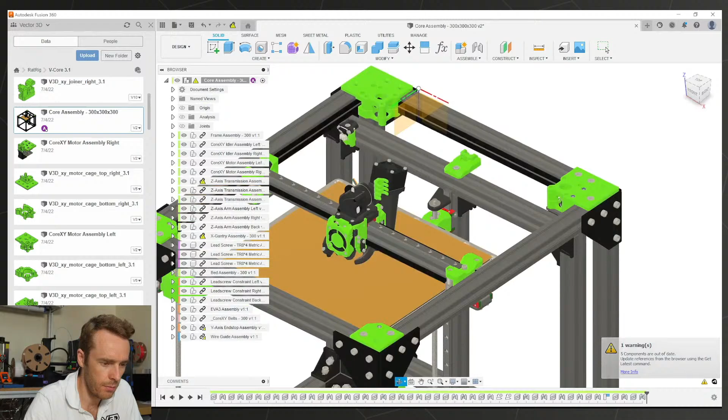Hopefully I can handle this fine. Yeah, it seems reasonable. Oh, it's a bit laggy. I think I've left an origin on one of the parts, but that's okay. It is still laggy. Maybe there's something in here that's particularly difficult for it to draw. Which parts are we up to? Did we finish XY joiners? Guide assembly. I think we can do these front idler assemblies. This would be a good one to do.

Oh, cool. Am I audible enough? All right as well.

Right, this looks good. So, going to use mostly the same techniques as we did in the last stream. Expanding holes, so we expand them by, oh, hang on, no. Sometimes this is weird. I don't know when it chooses to do one or the other. Oh, let's copy the bodies. Forgot to do that. There we go. Sometimes it sets that dimension here, whereas other times it will do it properly and it will be an offset based on the current dimension. Ah, there we go. It just needs to be that. Cool.

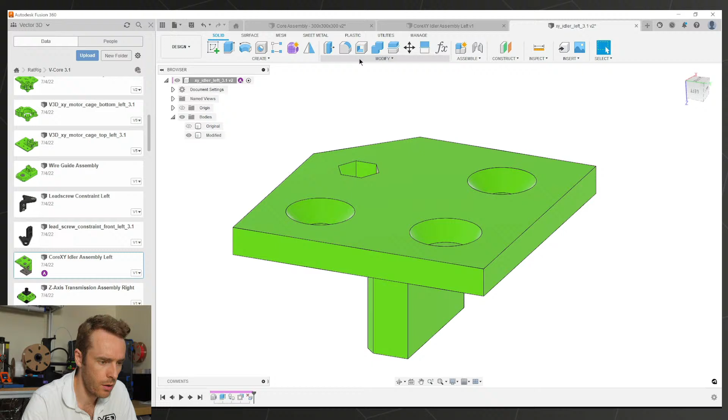So that just makes the holes a little bit bigger. Oh, I forgot to turn off the original body and then do it again. Minus 0.1. That enlarges those holes a little bit. Then we need to take off this chamfer. Edit this feature. Okay. Then we put on a new chamfer. Change it to 2 distance, 1 and then 0.5.

And then we've got some extra chamfers around here. I think I put these as 2 before. I think this needs to be different. I think we had 1.5. I'm going to go check the other part that I've done and we'll make it the same. I think that would make sense.

Skyping in the print room watching this. Oh dear.

So 2 down, 1 in. Okay. One in, 2 down. And then we make this one 2. Hopefully that'll be a bit nicer. Going to put a small fillet on this corner because that's right in the edge of where it's going to assemble, so that pushes right into the corner of the metal parts. So we put a little fillet there to make sure it doesn't collide with anything. If you have really well-tuned pressure advance, then it would be fine anyway, but then we've got this little monster to deal with.

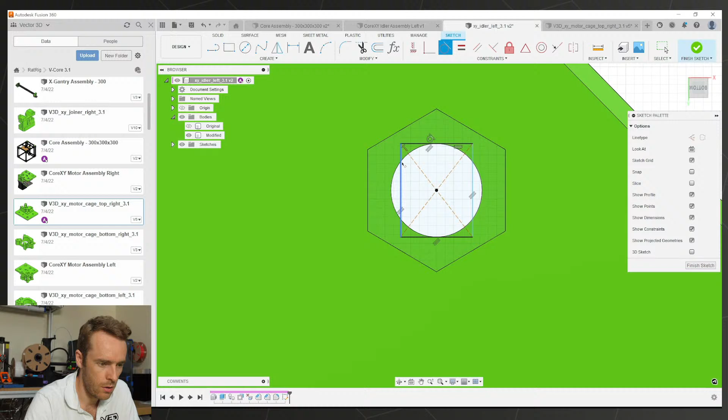Just noticed, because the screen on this laptop is 4K, everything's scaled to make it normal size so you can actually see things. But there are some things that are based on the resolution of the screen. So you can see the mouse now is really, really tiny. And the little symbol to show tangency is also tiny. But as soon as I leave that tool, it goes back to normal size.

Abracabra in Printables. Ooh. Those look quite nice.

I should be able to share this. So these are some alternative XY parts. Yeah, you can see the aesthetic change. They do look quite nice. That little black with green face accent just looks kind of tidy as well.

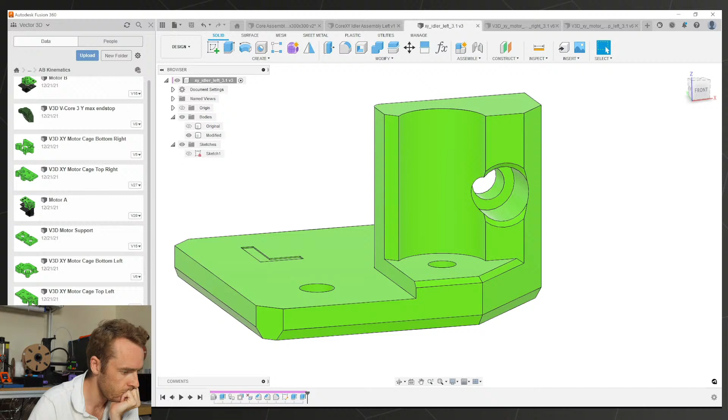This is my old VCore 3 idlers. I probably didn't change them. Oh no, I completely changed. Oh yeah, because mine was a slightly different thing, so totally different design. Okay, let's not worry about that then. Oh, where's it gone?

I might change the design to have a flat top. That might be nice. Let's just do it from here, that'll be fine. Oh, what? That divided by 2. Oh, get rid of that. No, it's upside down, other way up. Twit. Let's just start again.

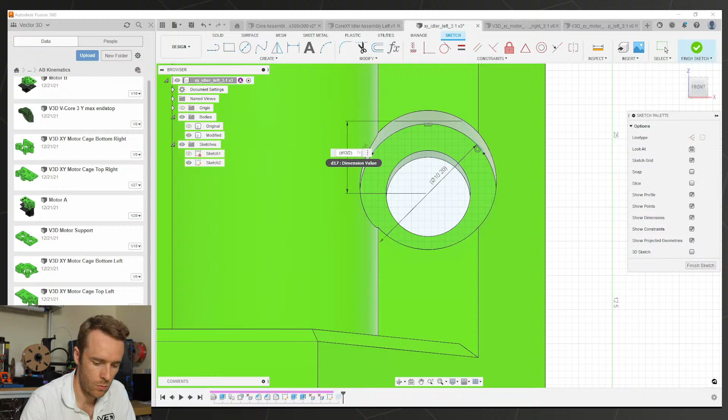Did you have to do any frame adjustments when you were done with building your VCore 3? I didn't adjust the frame on my VCore 3, no. How's your experience with scaling the parts for ABS? I've read somewhere you need to scale them to 100.5% to make them fit. Oh man. Where has this information come from? Everyone wants to scale their parts by 100.5%.

Kind of like this, maybe a bit better. I'm not sure. I really want to be able to just do this three-way chamfer that Pavel does on these corners, like on this. Here. That feature here is basically a cut, a plane cut through here. I don't know how I would do that.

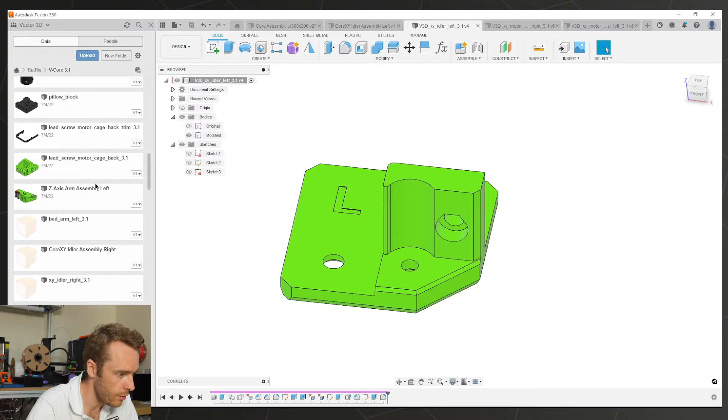Oh, sorry, I just realised I'm on totally the wrong screen. Oops. So we need to find the other one of these. XY idler. So I've got the left one, I'm looking for a right one. Ta-da! Capture design history. Copy the bodies.

I need to go get a fan because it's obscenely warm and I can't work like this. So I'll be back in 2 seconds. We can put some intermission music on.

Right. How many people are watching this? 17. Okie dokie, let's carry on. Oh, is the latency different on this stream? Yeah, it's on normal rather than ultra low. But never mind. It's fine.

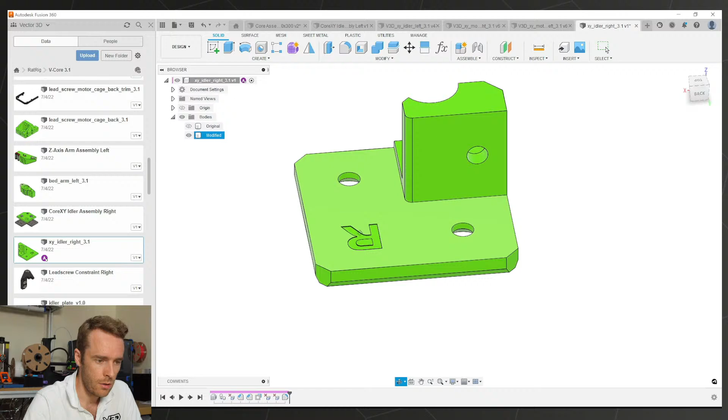Do our offsets for the holes. 1, 2, 3, 4, 5. Look at those, and fillet here. What else was there? This one. We haven't done this. Let's do this before I forget.

That's good. Hey, 247. No, yes, this is with the NDI. It's so much better. Vastly, vastly improved. Nice.

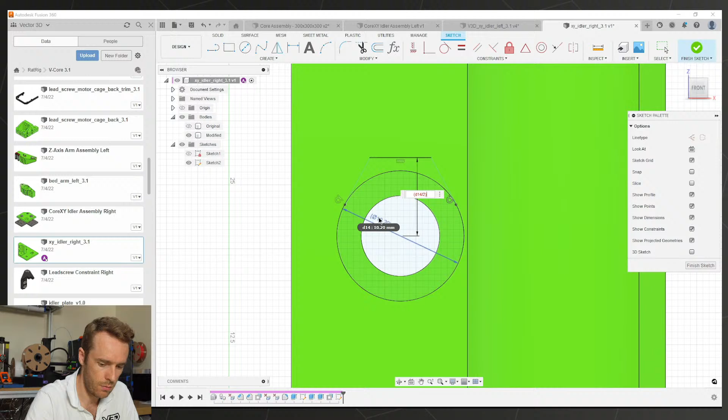We need dimension for this, and then we do this to here, and it's that divided by 2 plus 0.5. And then we're putting, I think it's 2 in it. Chamfer. And then we'll do this bit as well. No, this one was fillet. I think we should put a small fillet here as well. I'm reasonably satisfied with that now.

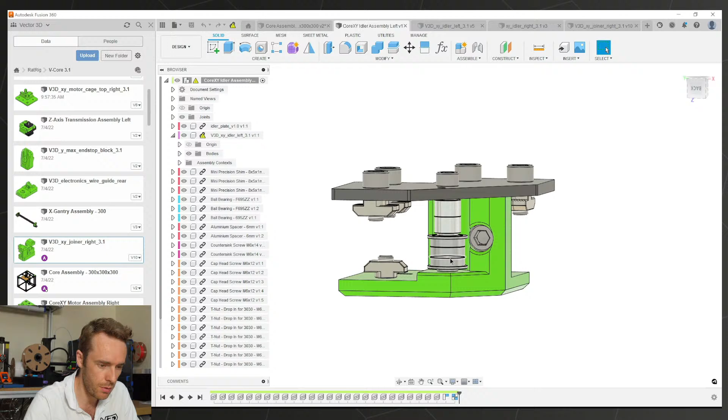On these idlers, where has it gone, that bit that I was just looking at? It would have to be at the bottom here, which means when it's printed this way up, you would end up with a ridiculous support, which is pointless. On the other side, you could do it because these would be at the top and the bearings would be at the bottom. Is there any point? They would look more unsymmetrical. So I don't think there's much to gain, really.

You know what would be really interesting? To have this part without this, just take that whole flange off and just have this tiny little piece that's like this top hat with this through here and maybe a screw that goes into the base of this. That would be interesting.

Why the different heights in the bottom of the nut hole? So in here, this is facing printing this way down. If you try to print a circle, so without that feature, if you try to print this way up, this whole area will have nothing supporting it. So there are a couple of ways you can do it. One of them is the sacrificial layer, which is what Rat Rig quite often do, and it just means you have to take out that layer after you printed it.

I'm not particularly a fan of that because then you get bits of plastic all over the place, maybe stuck in the nuts, and it kind of jams things. It's not a major problem. If you're careful, you just clean it out. It's fine. But if you tried to print it just as it is, it would kind of droop into the hole and just not work very well.

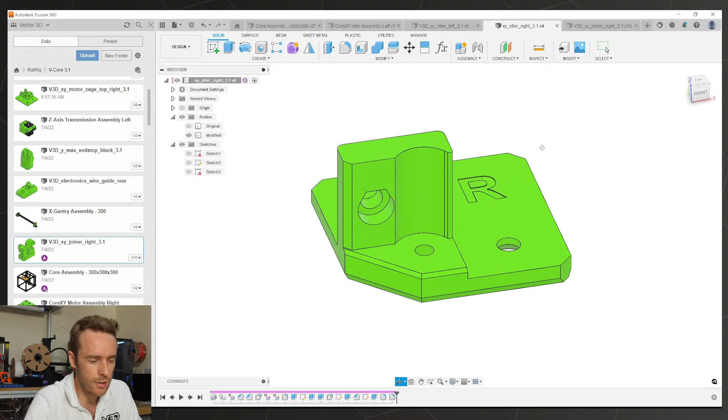I prefer it. The thing for me is, why would you not do it? There's time, and if you have to change your part and then move the feature around, maybe that's a pain. Other than that, I can't see any big reasons not to do it.

One thing I've just considered is that the head of this screw might protrude quite a bit. I think from here we should be able to check that, so let's whack that on there. It does. I'd quite like it not to protrude, so let's work out how much it's protruding by. Basically 1 millimeter. So if we make this -4 instead. Hey, yeah, that's not great.

How do I want to deal with this? Just do this. No, because of this interference here. Oh, there's no reason why we can't just move the hole over a bit. It's not locating into anything, so we'll just move it. I love doing this. Not moving holes unnecessarily, but being able to move a feature within something else is insane. You ready for this? Blub, blub, blub. Done. Move it 1 millimeter across, and then we can hopefully do this 1 millimeter out.

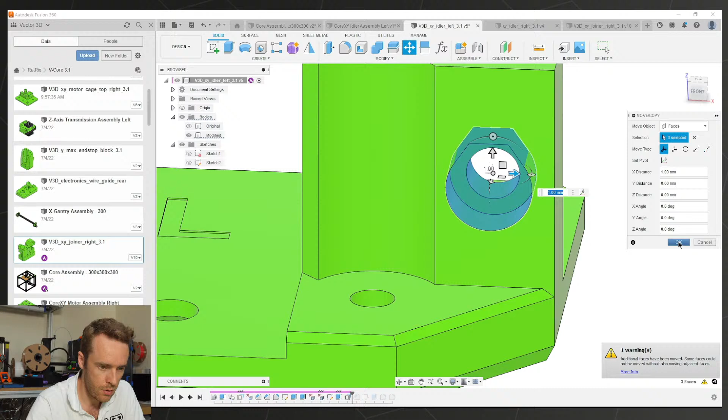What about here? Is that acceptable? Yeah. We don't want that to be weird. We'll just maybe have to redo that. That's fine.

Well, I suppose that's not quite part of this face, so it's going to put that in anyway. Well, that's fine. Whatever. And then we're going to chamfer this. I think that's this anyway. Yep. And then put the chamfer back on here.

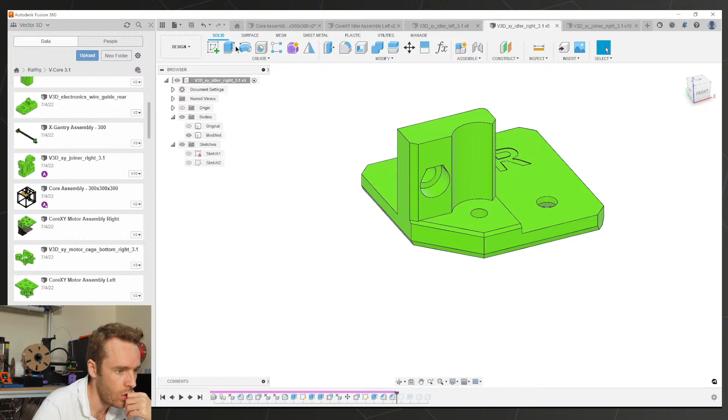We can update this, have a look on here. Ooh, nearly. Right. That looks cool. I like it. I like it. Very, very nice. So which part should we do next? That's the question.

I can't change the latency. I don't know why it ended up on normal latency. It's kind of annoying. We can be going nearly 45 minutes already. That time just disappears.

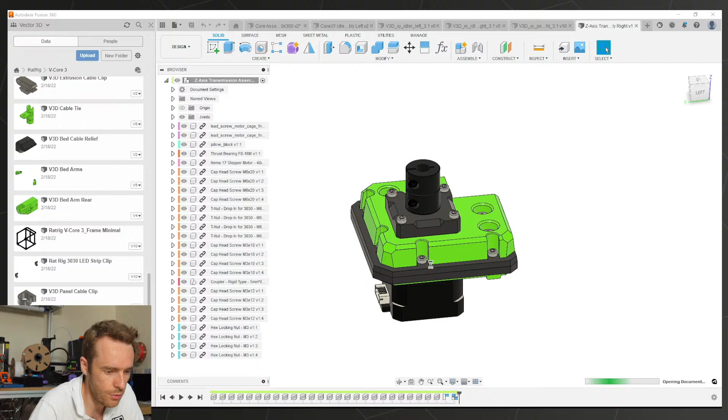Oh, by the way, I hadn't shown this before, but one of my ideas for having stiffer Z mounting was, oh, is it on here? Maybe not. Yeah, this. I think this would be really cool. So because they're obviously using metal plates already, have metal plates at the top of the Z part, and then just plastic as spacers. Make these bolts a bit longer so they stick out the top rather than having to be embedded all the way down here. It should make that really stiff assembly. It's probably alright already, to be honest, but it just seemed like a nice little idea.

So, oh, my doorbell's going. I'll be back in a second. Right.

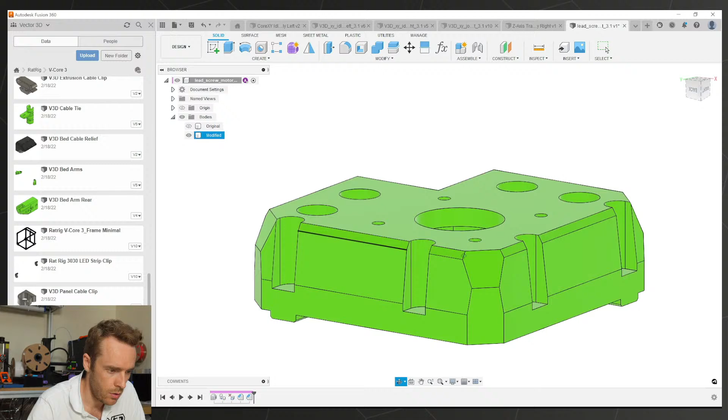And then for the other bits, I'm going to do around here, here, here, here, here, and here. To distance. That's that. This is going to be a little bit not pleasant. Change this to be so, and then we get this on here and here. I think that's a little bit tidier. And then we got the small chamfer for the internal stuff. So

And then we've got to find out what we're going to do on these. These probably don't need anything, to be honest. Oopsie daisy. That looks pretty neat. I like it. So we've got sacrificial layers, we've got plenty of those we can do.

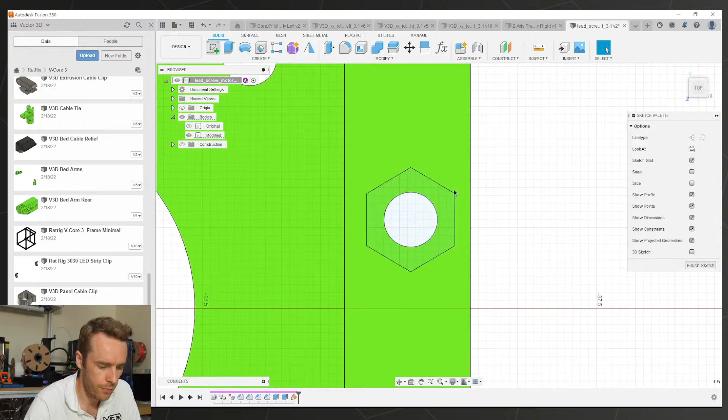Okay, so let's add a plane in. Plane at an angle. That'll do. Down a minute. Oh, I was gonna move this as well, wasn't I? I think this needs to be moved.

The thing I'd be concerned about is this nut falling into the channel. It may not be a massive deal, but let's have a look at the frame. Do we have the whole? Yeah. So here, that nut is right above this. If you put the panel in and then put the screw on the top, as you push the screw in, you could push the nut out the bottom.

I'm wondering if we move it to here, can we still fit the nut in? I mean, it works over here, so it should work here. We can put that in, and then if you press it down, it just depends, I suppose, on the length of the screw. You don't have any extra screw length. I don't know how long those screws are.

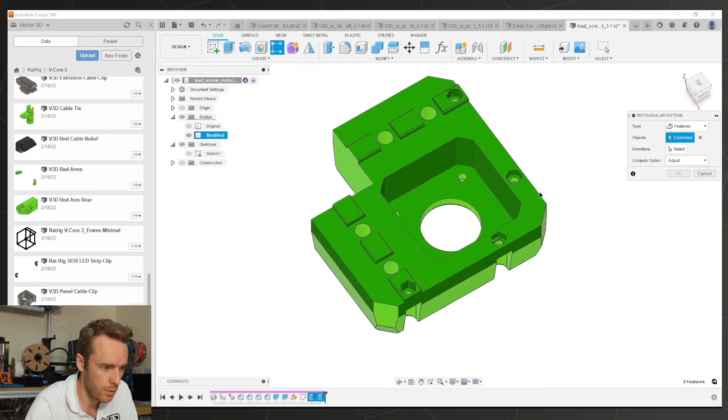That's 42, so we need to then take those two features, pattern them in this direction, 42 millimeters, just two, adjust that, nice, and then take that and that, oh no, that and that, show our construction plane and also mirror the construction plane. Nice.

Apart from I've been an idiot and I've done it on the wrong blooming side, haven't I? What an absolute twit. Oh dear. Delete, delete, delete. Will we need this? Let's still use that. Right, let's try that again.

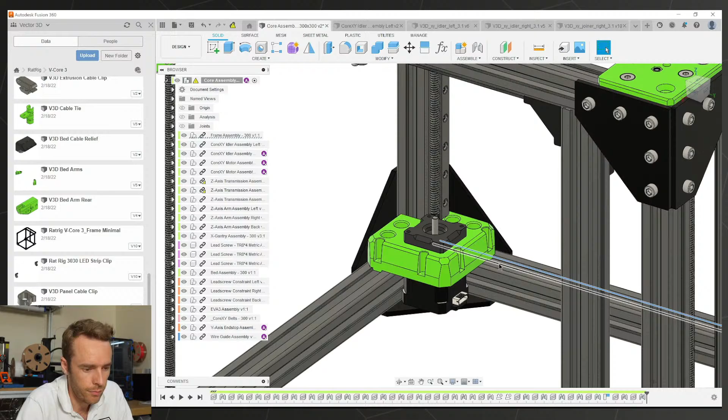Ooh, I've only just noticed that. Is the bed now a new shape? Can someone confirm that the bed has now got that little cutaway? Because that is awesome. Maybe the one other thing that would be nice is some M3 screws or something in the back for alignment. Oh, that's nice. I'm happy. I didn't see that before.

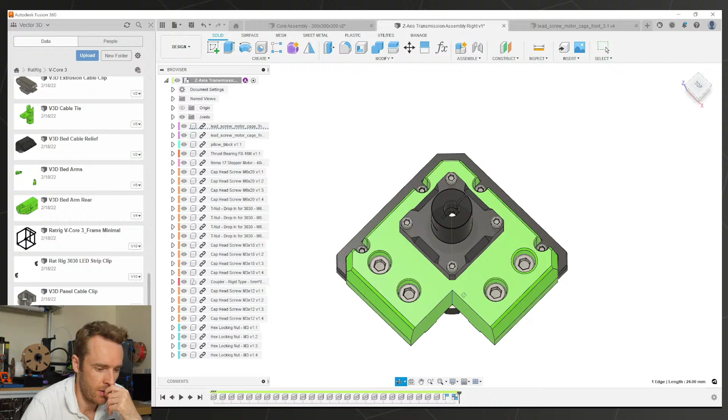Maybe some treatment in this corner, but the extrusion's got a little 2mm fillet on it anyway, so there is a bit of extra material on there that shouldn't be a problem regardless. I'm not sure we need to change this part anymore. Have we done our hole offsets? We've not done any hole offsets. Should have done that at the start.

Jiggy, jiggy, jiggy. Right. Hopefully all this matches back up again. No, it didn't. Great. Fambloobity-tastic. Where's the sketch? See, that's fine. Why is the sketch not? That is not the size of the hole at the time of that sketch.

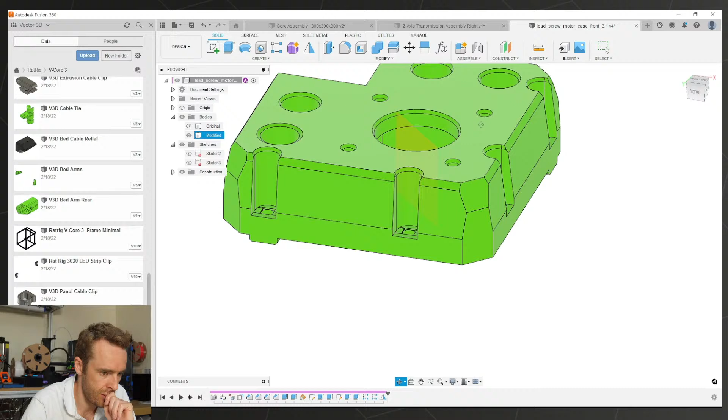What's going on here then? Yeah, those sketch features don't rebuild properly. I think now it's fine. Yeah. I'm half tempted to take these bumps off the bottom, but it might be overkill. What I might do though, because we don't want these to be our critical faces, I think we'll pull these in a bit as well.

It might be wise to put this the other way around. So we're going to have to select here, here, here, here, and here, and set the pivot to be the middle of this circle. There we go. And then, with a bit of luck, we should be able to just rotate it. That'd be nicer. And the same over here. Oops, there it is. I think that'll be a bit tidier.

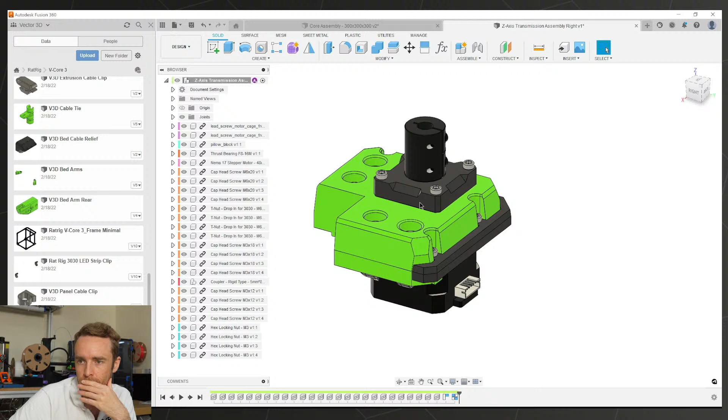Time flies. Hour and what? Hour and 10 minutes. Okay. My neck.

Do we want to make this block a little bit larger? Don't think we need to, doesn't really add much. What about this piece? Does this need anything? Let's just isolate that. Right, let's go and put that way up. There's no way these are going to look sharp. They're going to be a bit wibbly wobbly. What can we do about that?

Let's chamfer. It's only a little feature, but I think it'll help, especially with that little overhang as well. I think as soon as we're here, we'll do this. That should fit pretty good now.

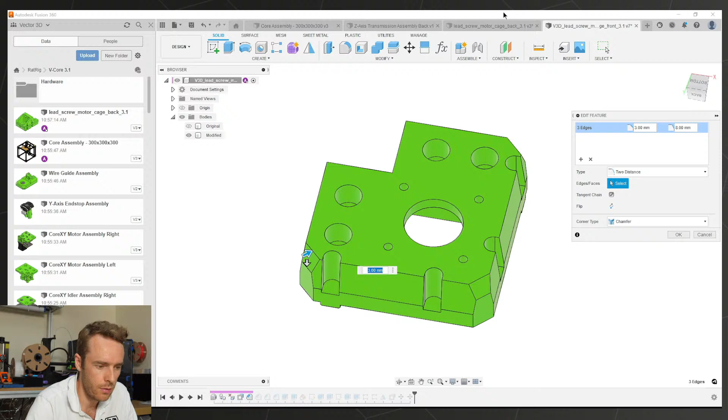All of these, 3, 8. And then 1, 2. Oh, I've just noticed this one for some reason has gone backwards. That's blimmin' fantastic. I've one as well. 1, 2, 3, 4.

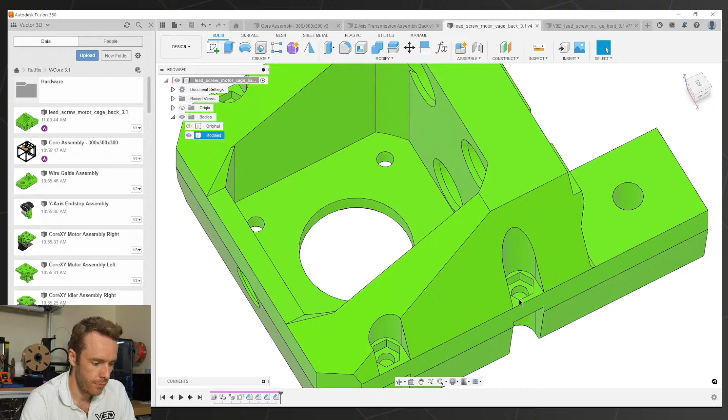We're printing face down, aren't we? So this one. Nice. And why does it always end up the wrong way? No, it's still on join. Cut. Yes. Okay.

So what's the distance here to here? 32. Oh, we could just do... Will it work? No. Direction here, 32. Minus 32, 2. And then we've got this nice plane that's right down the middle, so we can mirror over that. Mirror those features. Then over here. Right. Ugh.

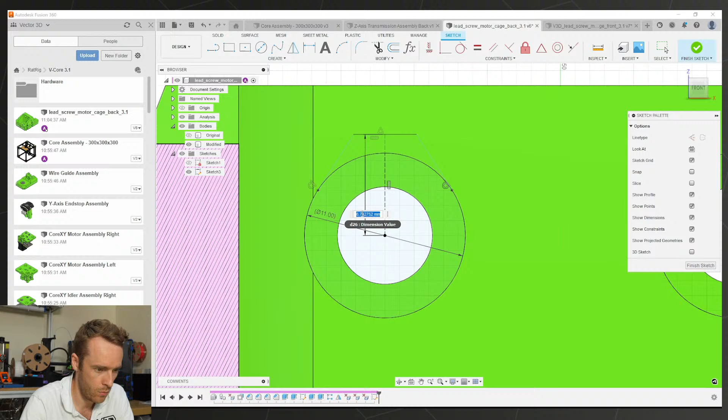I want this in multiple places. I should have done that over here, and then I could have patterned here and here. Let's just start again. Doesn't take long. Let's start the sketch again on the right place. Let's sketch here. This will be better. Long bracket. Stick this in at 50, no, 45, no, 40, that's the one.

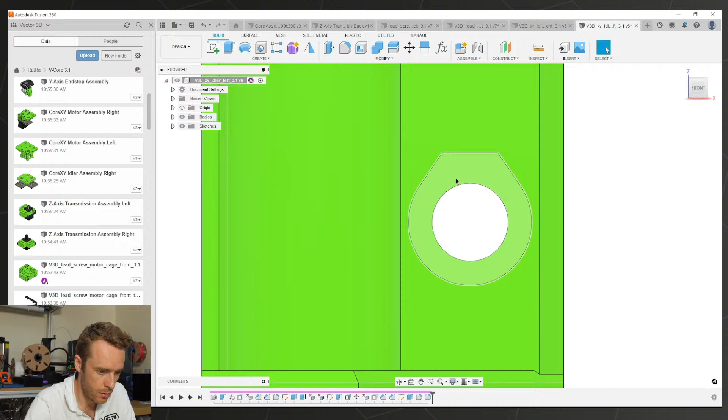Now, hopefully, do this here, this here, and then we have to suppress this one, and this one, and this one, and this one, and this one, and this one. Ta-da! I think I didn't properly define those overhang angles in the other one. I didn't. Laziness. Let's get the left one as well. Oops, missed.

I mean, people want colours, like build specific colours, because people like to have matching colours and stuff. I don't think I can do enough to warrant that. But just having one colour that works for nearly everyone is normally black, isn't it, I suppose? Believe it or not, I'm now starting to get cold through some sort of miracle. You're blowing off air and you cool down. It's not too humid yet, so. Right.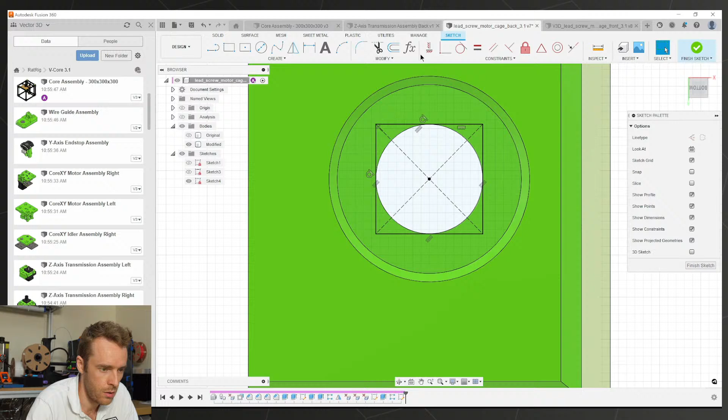Oh, what did I do with the big one? There it is. Yeah, so those will bridge over that way. Those can bridge over that way. These are against the build plate. Need to do this one. I'm going to take these away. I don't think they're a great idea. You're asking for trouble with that. It looks naff having just plain geometry like this, but it's going to be a better decision. What we would put is one in there, though. That's a good idea.

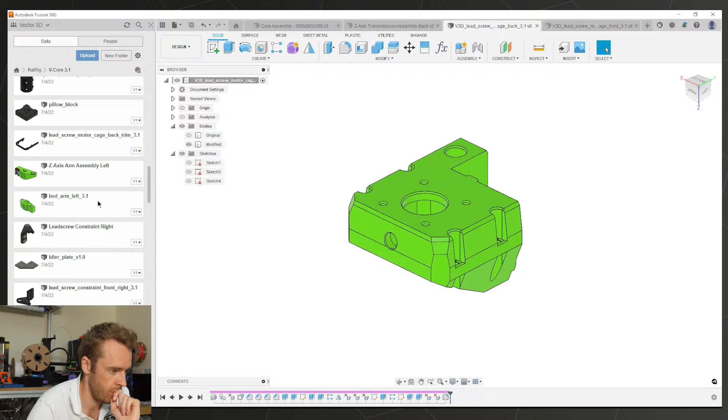So we can rename this one now. Oh, what we do need to do is this, isn't it? Is there much? Probably not. I don't think there's anything to gain from removing it, so I'm not going to bother removing it. Tolerances are quite optimistic, I think, for this part actually. .2, that's not too bad. Should be reasonably flexible, so.

What do we think? What do we think? And what do I think? This hole just looks weird. What can we do about this hole? I've just noticed that this is not right.

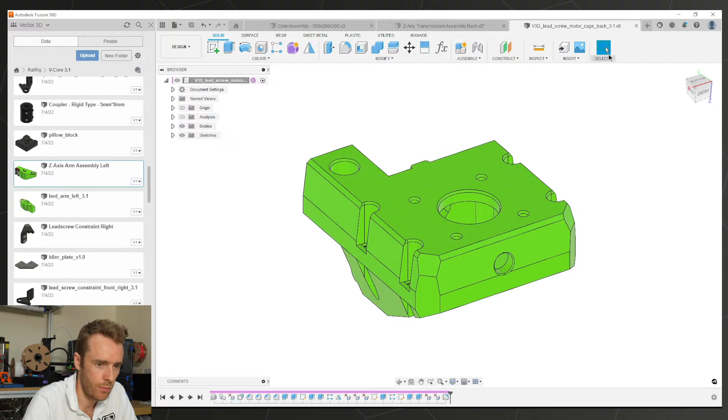Capture position, no. Right, now we're on to arms. Dropped to 20 people now, and now to 18. Oh dear, this is weird. So, what do we want to fuss with this?

My question is, what are the angles? Because I don't think this angle's right. I can't read it, it's under the thing. 146. I don't think it should be 146. I'm pretty sure these are supposed to be... Well, excuse me.

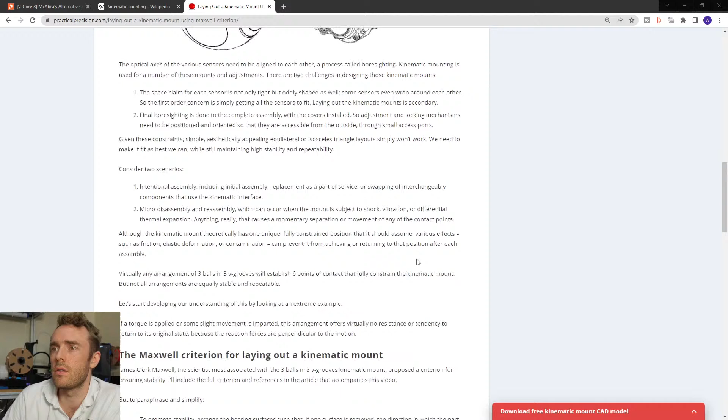Shall I share this? Here we go. Second screen here. I don't know why it's all over one side of the page. I'd have thought they should be separated around the circle 120 degrees, so each exactly 1/3. Maybe it doesn't matter.

Sounds like these models might be useful, but I'm not going to download stuff while I'm streaming. Well, let's not worry about it because it's going to be a big change if we need to do that, so I'm not going to bother.

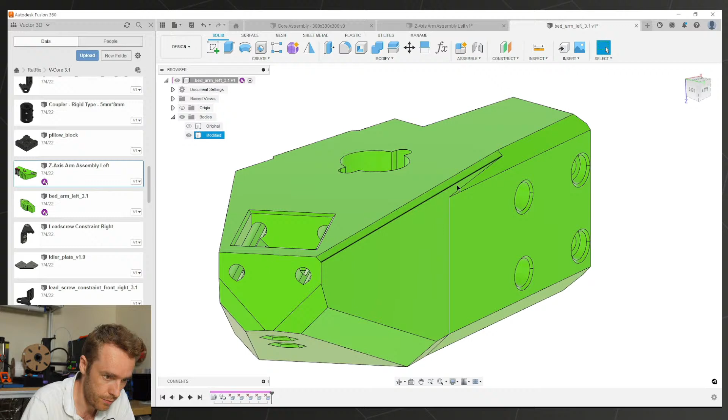So it's obviously printing this way up. So these chamfers, which are around 45, I want to get rid of and change for something else, because with ABS you just can't have the cooling needed to get a nice looking overhang at 45 degrees, in my opinion. So let's check these out as well. And we can put our base feature in here too for these holes. Oh, I've done it all as loads of features again. Silly Billy. Oh well, we'll just group them.

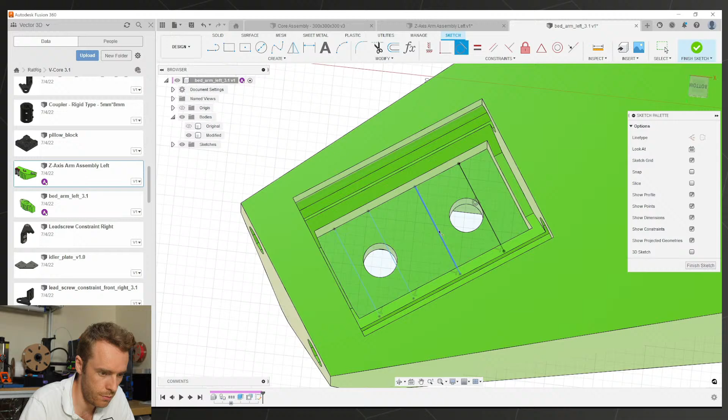Cut through there. Right. Let's start with this in here. I want to do this, because I know it's going to be a little bit annoying. So this way, something like this. I probably want to do it the other way actually. That would be the shorter bridge. So I'm doing this whole manipulation trick here just over a larger area with these two holes at the same time. Oh, we could do this way anyway, couldn't we? So

now we're going to do some cutting. So this way is the long bridge, so we want to do that second. So we want to cut out for the short bridge first. So like this, I think. There we go. That should make those easy. Now these chamfers.

The originals look like that, so if we go maybe here and then here, I think that would look okay. Just put both on here. Oh, this one's gone annoying. Why do you do this? Add another one here. That's 6, 3.5. 3.5.

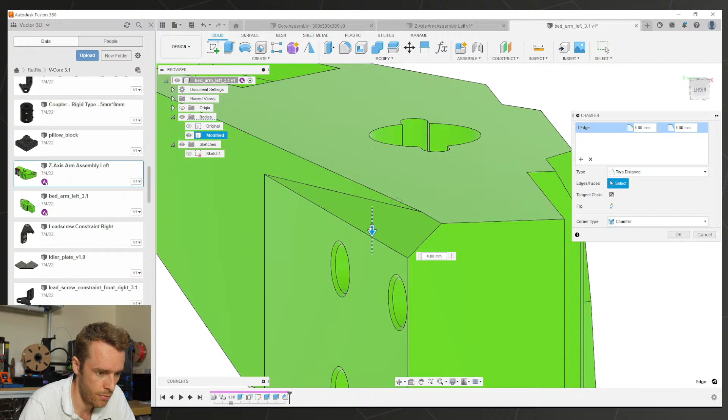You have to do it symmetrically again. Let's do that on the end one too. And then this one here, we can do the small. Oh.

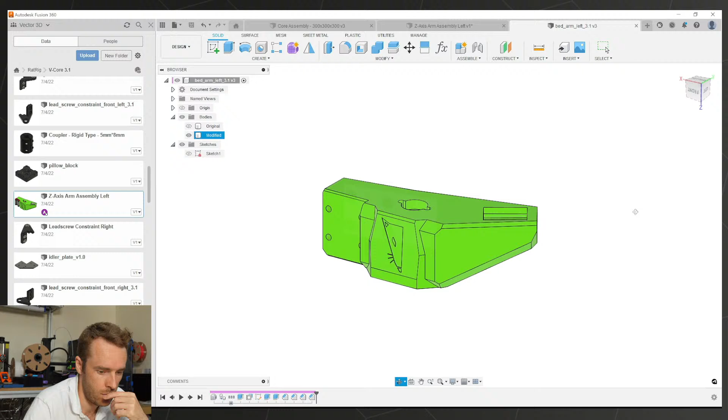I'm going to take the offset off of the inside of these holes because we want them nice and tight, really. It's not ideal, but I think that'll be better. Are we missing anything?

I think for these, the right one is symmetrically opposite, so don't worry too much about that. I don't want to remodel the whole thing again, just so we can put a different letter on it. What's easier is to, where's the origin in here? Kind of the wrong side, but that's fine, whatever.

Body, this, mirror plane, this, and then we just delete the L. Oh. So left is left and nothing is right. And now you've got both without any faffing for the entire second part. And then I'm just going to hide this one because otherwise our model's going to look weird.

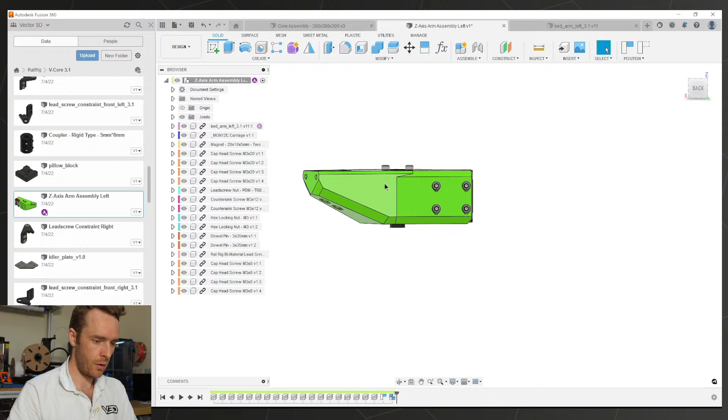Is that going to ruin? No, I think that'll be fine. Oops, I need to move these back beyond that, otherwise it's not going to be there. Nice. You know what might be a better idea than doing, oh, we'll just save, copy as, v3d, bed arm, right.

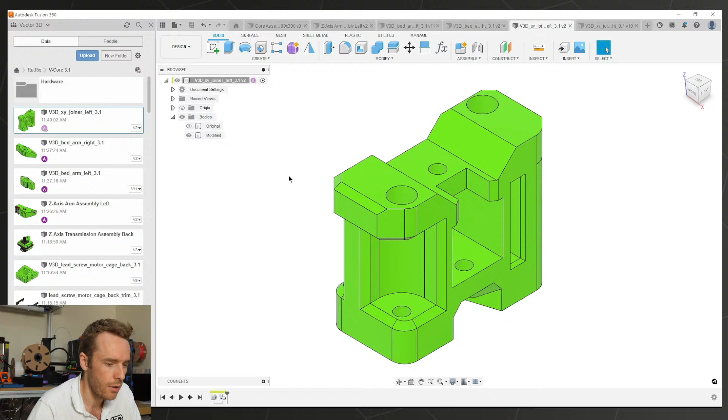So for the CaliFlower, you can scale it to 200%. I've put the number in the spreadsheet so that you can, but make sure you have calipers that you can also measure that larger print with. Otherwise, you're going to be no better off. In fact, you will be worse off. 100mm has worked well for pretty much everyone so far. There's not much reason to go bigger. I mean, technically, yes, bigger is better, but you've got other inaccuracy issues that you're probably going to have before then.

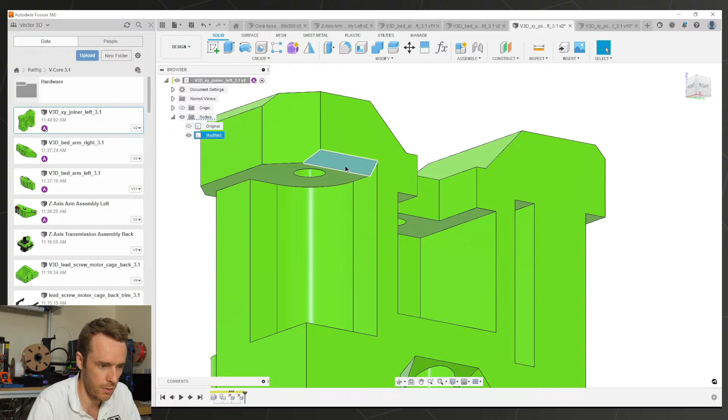How has deleting that face ended up with that? That makes no sense. Okay, well now it's gone. So that, and then that gets rid of that. That gets rid of that. And then it's whole offset, isn't it? Yes.

And we're filling in this lot down here. We end up, oops, to there. Let's project that and that.

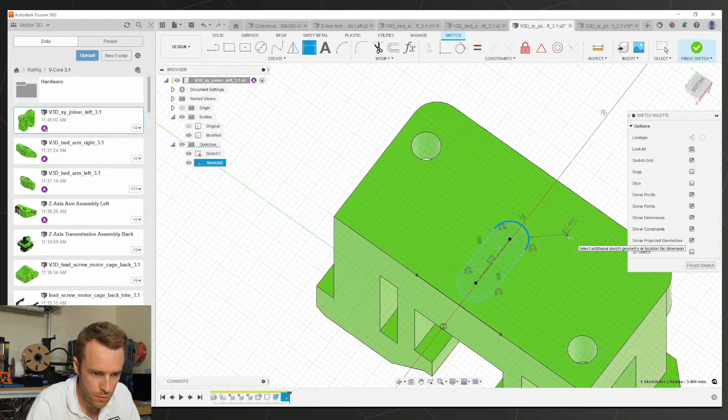Let's change this to teardrop. I think it'll look nicer. Like that. Did that just go tangent top? No, that's 4.8. Okay.

Just noticed this is completely filled in. That's not what we want. We want that. There we go. Let me take this. No. Take this. Let me take this. Minus 12.5, I think it is, or something. 2.6.

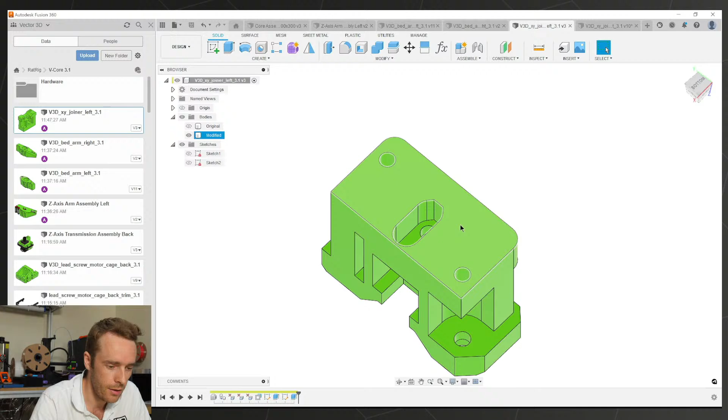You need to adjust for the amount of cooling you can use. For example, ABS, you can't really just put on loads of cooling. If you put on loads of cooling, you lose your layer adhesion. It's still ABS, but it's not got that durability because the layers fall apart. PETG, you can just kind of cool it a bit more and you get a nice overhang. But if you don't do that, then you get sloppy overhangs on ABS, which we don't want. Nobody likes a sloppy overhang.

So rack at the back, up 30. So this is where it gets different because it's on the other side. I do want to get this right though, so joiner left is what we're looking for, to make sure that any changes we make are in the right place. Well, I didn't find it. Where is it then?

There isn't an assembly for it. Okay. It's just the gantry assembly, I guess. Over here. Yeah, so it's top down for the left side.

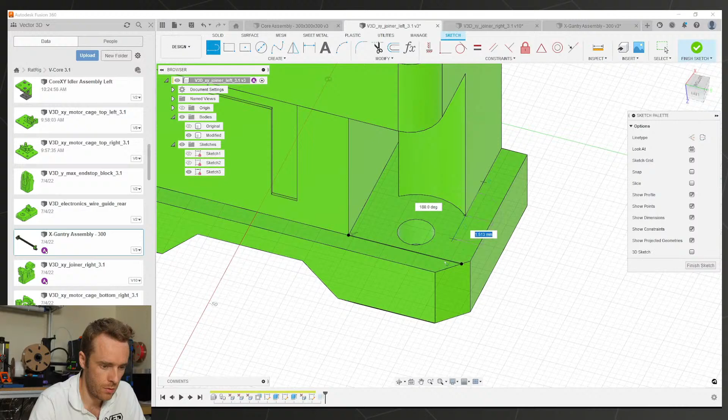We might get rid of this. I'm not sure we really want this face coming down here. This outside. Looks a little bit precarious, but should be fine.

We have the other sketch which pulls that face the other direction. So that's that one, top down. So this one will be bottom up. This is going to be easy because that's just that. Cool. Right, no chamfers, 3.5. This should be gone.

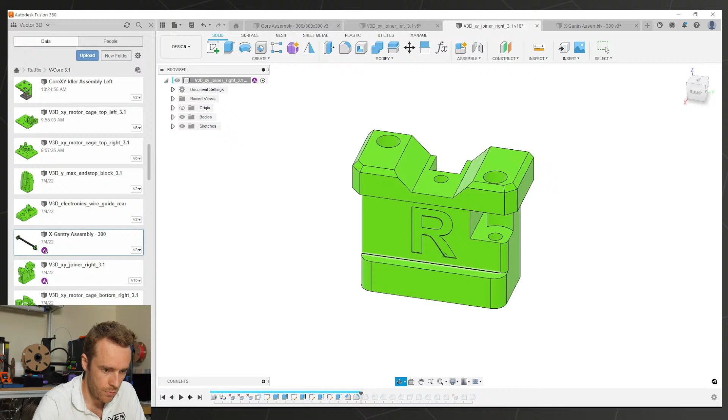Oh, we didn't do the top bits for those, okay. Why do I keep going to this one? Five at the back. One, two on those. Oh my goodness, why do I keep going to the wrong window? Shabba, 2, 3, 4. Two, one.

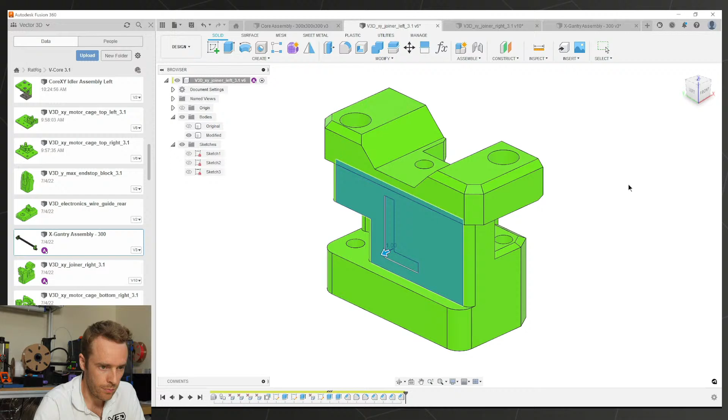What did I do here? 2, 4. Okay, so no, not fillet. Don't jump up. So, and the same here. 5, 7. Okay. Here's this one. Right. That should be the joiners both done now.

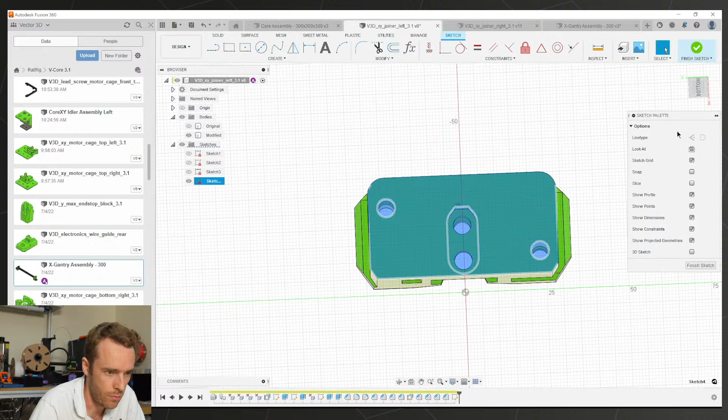Now, computer's just starting to go a bit crazy. Let me just check what's going on. I've got a unique cooling solution. Look at this. Some just biro pens stuck under the back, so you can get a bit more airflow underneath. Otherwise, it just overheats. Amazing. Well done, Dell. Great design.

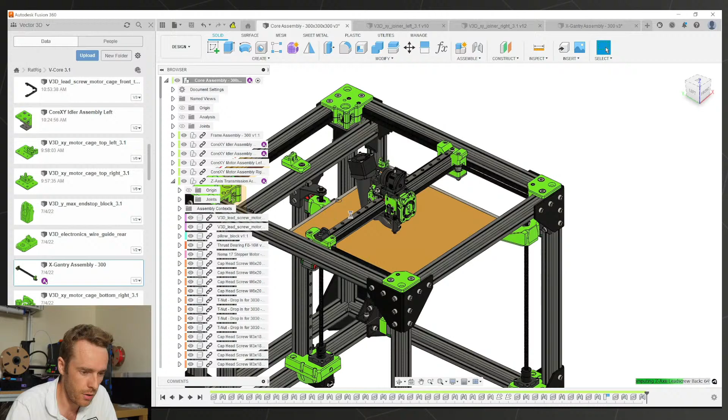Wow, 2.5 hours. Where did that time go? It's 12:10. Okay, I think we're going to stop there then. I think there's only one more part to do, so I might just finish that offline and then I'll upload all the bits that I've done. I'll give them a test print at some point. It's probably a good idea, right, before I upload them all. Has that been named? Yes, that's been named. And that's the assembly.

So yeah, I think this is the only part now. That's going to be fine. Is this part the only part left to do? Do I have time? Let's just do it now, because that way we've done everything. So let's get this one open so we have a spare to look at, so we can recall the features that we did before. Oh, no, down there, up here. And we got this one.

So history, capture history. Bodies, duplicate. The original and the modified. Save it so we can get the right name. Come to the top, please. Hello, there we go. V3D_bed. Right. I'm getting cold.

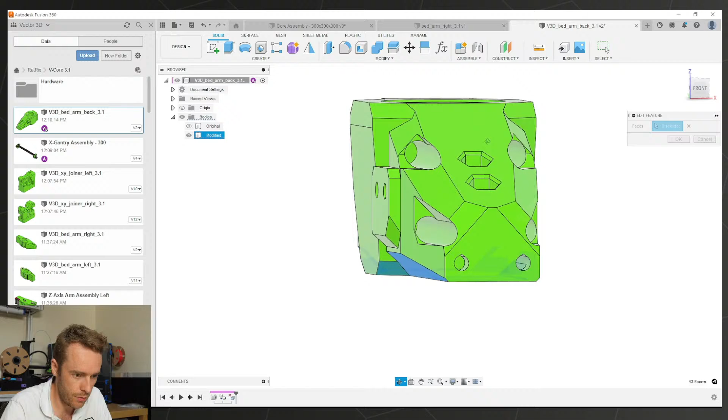This is not ideal. This one's not going to be easy. This one is so complicated. Let's see if we can. So normally I delete the chamfer and put it back in, but I feel if I delete that, it's going to go weird. It didn't, but I don't have the same face now for creating the chamfer. I think it's been drawn in.

So what I'm going to try and do is just move the chamfer and rotate it around its bottom face. Set the pivot to that point there. And rotate it a couple of degrees. Oh, it's taking all of that with it. That we do not want. We just want to move that face. It's keeping the tangency to the thing, which we don't want. I don't know why it's decided to do that.

Oh dear, oh dear. I've made it poop itself. How to crash Fusion 360 in 3 easy steps. Yeah, this is... I don't think this is coming back. Right, let me just close this, annul that. Yeah, I think that is a bit of a does not compute. I think we went to infinity there.

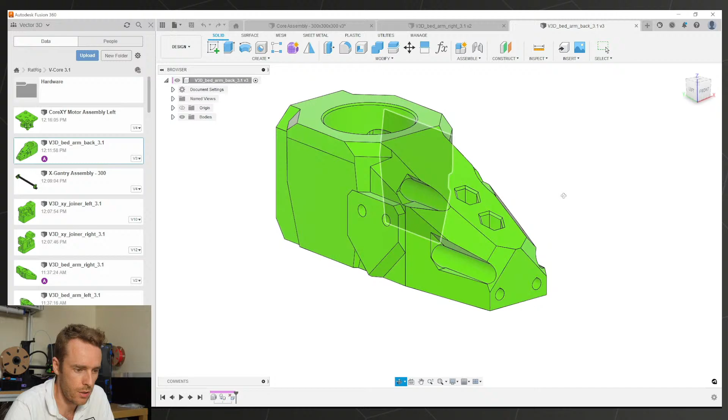I'm just getting rid of this floating origin in the back because it's annoying me. Looks so messy. I really wish you could drag these windows around. It annoys me that you can't. You have to close it and reopen it. There we go. Right, what has it got? What has it kept? What has it lost? Oh, this, what the fuck is this?

No, it doesn't want to do it at all. Delete this, and then delete this. I won't delete this. Delete this? No. No, sir. No can do. Doesn't like this one, does it? Doesn't like this one at all. What's that overhang angle? It looks like about 45. Oops, not that one. It is 45. What if we stick a one on here that's not 45? Boom.

I think what we're going to do is get this and just create a new line up here at the angle which we want, which is more like 40 degrees or even 35 degrees. Stick a line in the middle, mirror our design over the other side. Oh no, don't mirror that, mirror this. Over that. There we go.

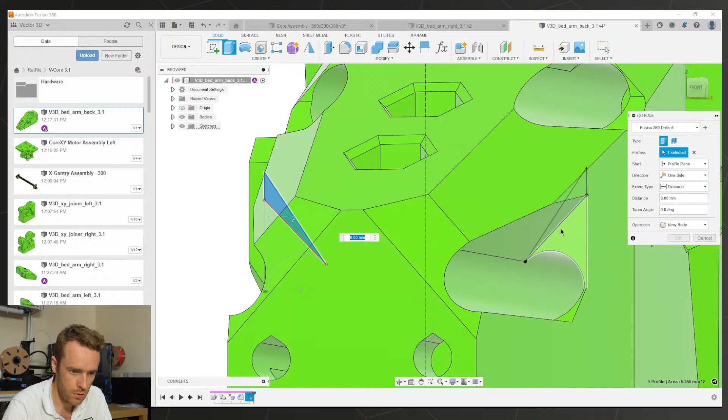Take this profile, bring it out here. Yes. Very nice. Let's do the ones up the top here. Mirror. There we go, let's improve those angles. Now we've got to deal with these little bastards. Loads of faces in here. Let's get all of these. I don't think it's going to like this. This could be another crash scenario.

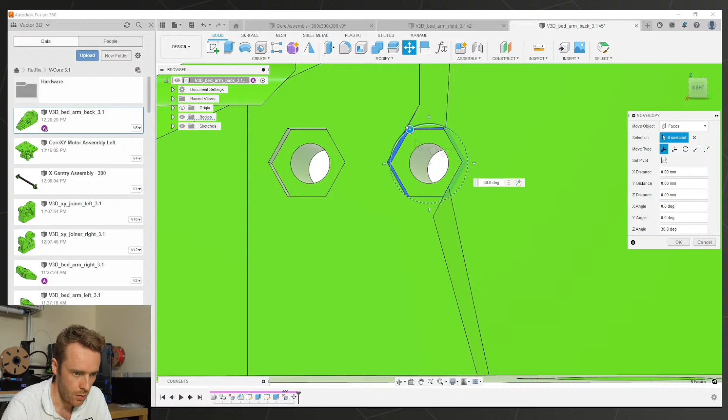Yeah, so this one goes a little bit funky because it's trying to preserve things that we don't really want it to preserve. What should we do with the drunken sailor here? I wonder what happens if we rotate the other way. Oh dear, no. Ah, that looks much better. I like this. This is good. This situation is not ideal, so we're going to have to deal with that.

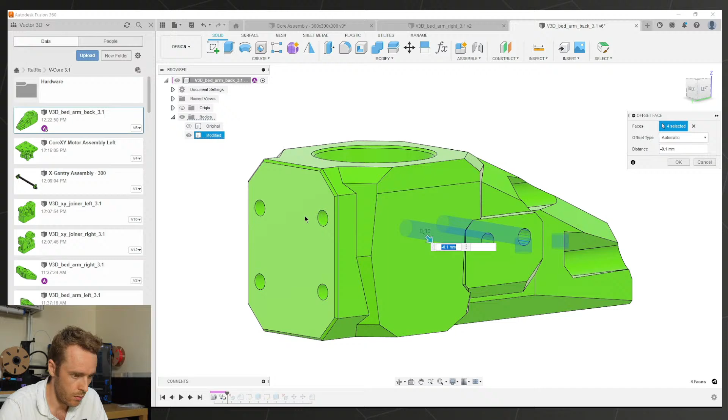We need to do our hole offsets as well. Let's do those. I've got to do these ones too. Yeah, we might just not do these ones for this. I think it's going to cause problems. Oh, what have I got? That's fine. These two in here, these four here. Why won't it go to the end? There we go. Right.

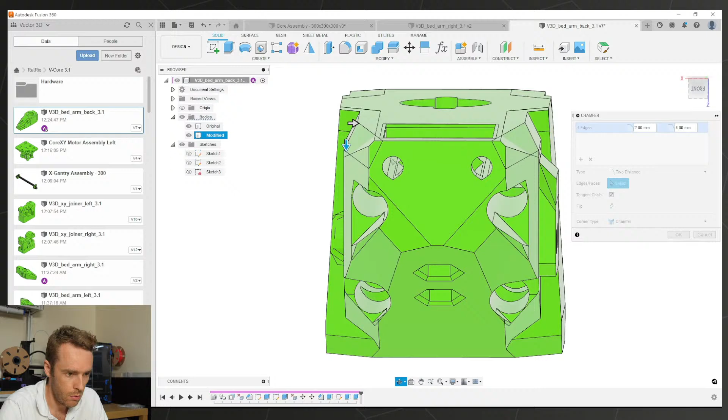To be, yeah, definitely missing some chamfers on this top area. Let's see what we can do there. So what have we got to begin with? One big one all the way down, and then smaller ones around here. We've now got two faces here, so I don't know where they came from, but it's now going to look a bit different. Unless I'm going to have to employ a sketch method again. Let's get this in here.

Get rid of this. 50. No, this just. I'll get that out of the way. Move you to about there. 1.25. Good. Back to this shape. So, how's this going to work? I suppose we could offset. Yeah, I think that's good. That's what we want.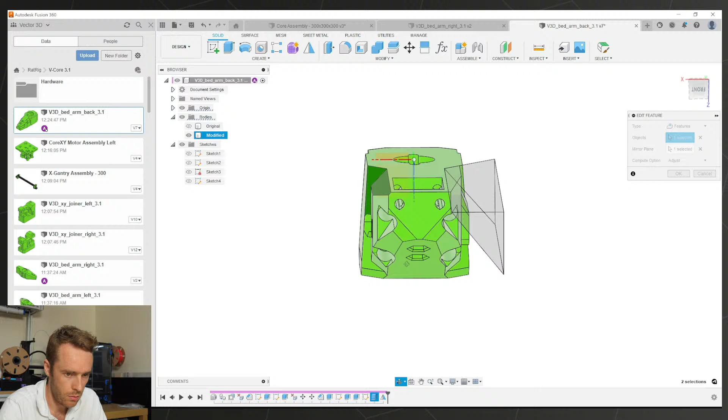Mirror, no, not the face feature. Here the plane. Bippity. Oh, that's not worked very well. Huh. Weird. Doesn't like it at all. Got a better idea. Let's mirror this. Set of lines over here. Now I can put this nice constraint because that'll help. So

take this one, start, offset, one side, to object, this face here. Whoa, is that right? That looks acceptable. Right, okay, sure.

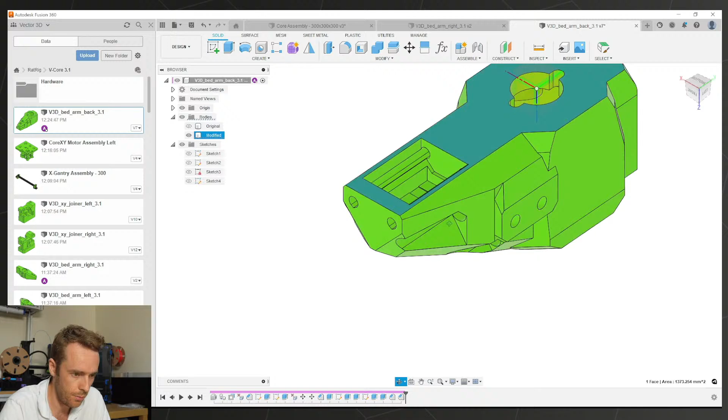I would like this not to come, so there's a lot of material here and there's not much filament holding this end down. I mean, it shouldn't warp, but I might try and improve this. If we take this out to, that's a bit over constrained, isn't it? Oh no, that's fine. 10. Puts a little bit more meat on those bones. Might put a cheeky little chamfer on the front.

Yeah, these holes are going to be a bit messy, aren't they? That's the other thing. I might just do that from this side. That would be... Right, so let's take a dimension on that again.

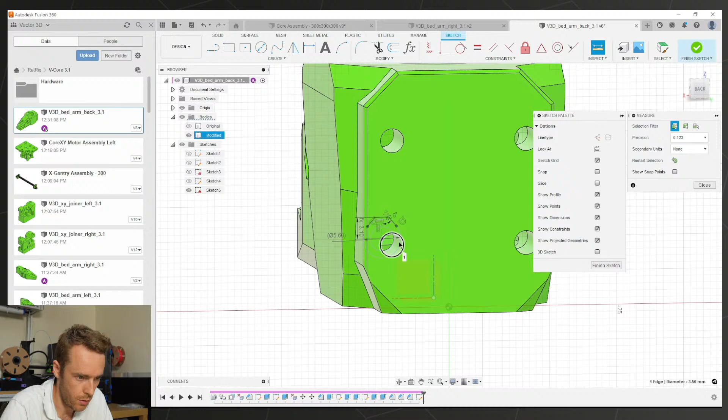What's the spacing on these? 20 by 15, okay. Rectangular pattern, objects, do. 2. Well, that worked out remarkably well. We'll just change this to 40 and then those will match up. Oh yes.

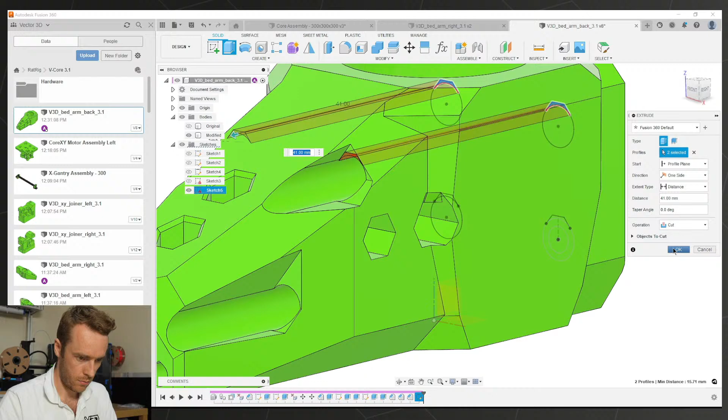I don't know why it doesn't like it. I think it's because the part of the cut is exactly equal on this face here. So we might have to do it in two parts. We'll do the top one to here. And do the bottom one to here. Yeah, it's not liking something around there. It doesn't quite line up. It's fine. Right. I think we're good to go there. That. And that's all those parts. Origin, like that.